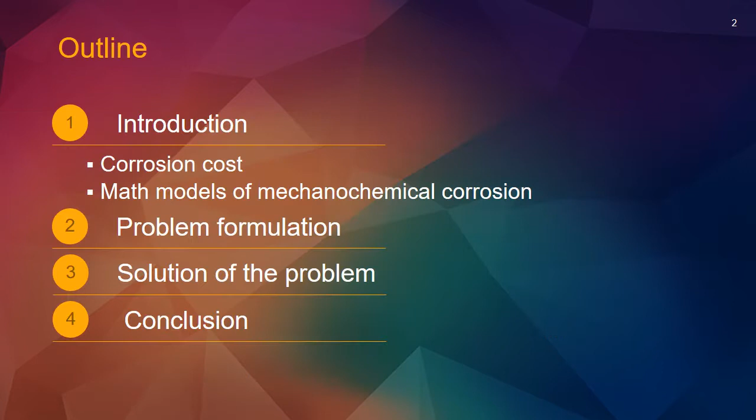Dear colleagues, our today's report is devoted to a thin-walled pipe exposed to corrosion under pressure and non-uniform heating. The outline of presentation looks like this.

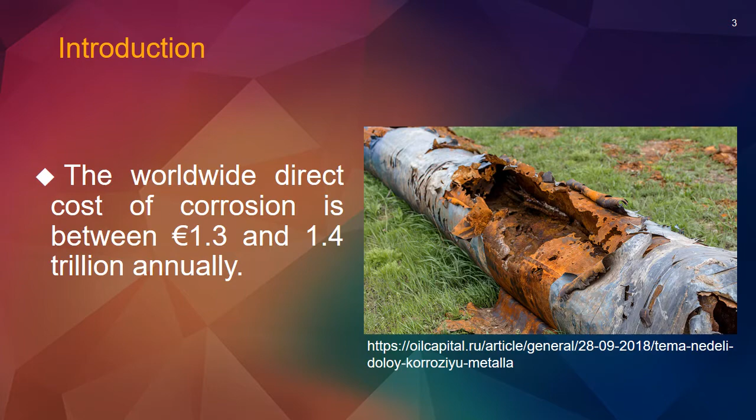Corrosion causes irreparable damages of industrial and building structures and leads to reduction of their durability. According to open data, the annual corrosion costs ranged from 3 to 6% of the gross national product of each nation. There are a lot of classifications of types of corrosion. On the screen you can see only some of them. We will consider surface general corrosion and more specifically mechanochemical corrosion.

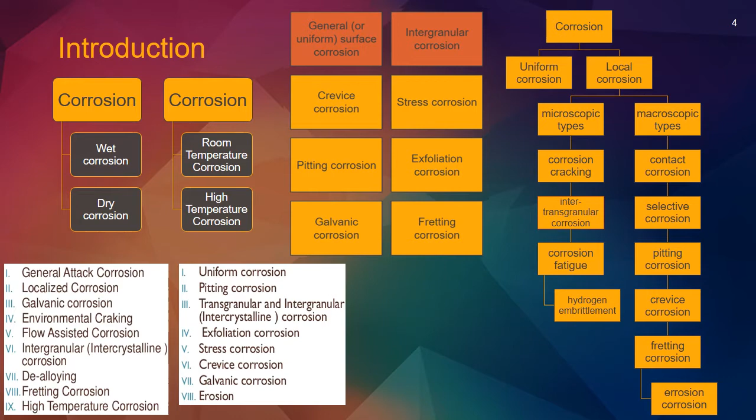Originally, the term mechanochemical corrosion was introduced by Emmanuel Gutman with respect to general corrosion facilitated by mechanical stress, to be more precise, for anodic dissolution of deformed metals. So, mechanochemical corrosion is more intensive than the simple superposition of damages induced by mechanical stresses and electrochemical corrosion taken separately.

There exist various models of corrosion kinetics. Gutman received the exponential dependence of the corrosion rate on the mechanical stress. According to Rusanov, dissolution rate is a quadratic function of strain components. According to experimental results, the rate of general corrosion is often a linear function of stress, if stress increases beyond a given threshold. This model with zero threshold will be used in our work.

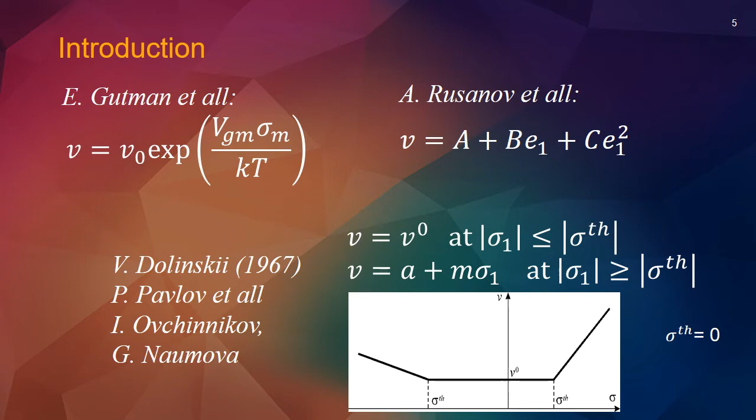Consider a linearly elastic thin-walled pipe exposed to corrosion under internal and external pressures of different environments at generally different temperatures. Let the inner and outer radii of the pipe be denoted by small r and large R respectively. Assume that the corrosion process is uniform along inside and outside surfaces with the rates denoted by Vr. We will consider only those situations when the maximal stress used in the corrosion kinetics equations is the hoop stress.

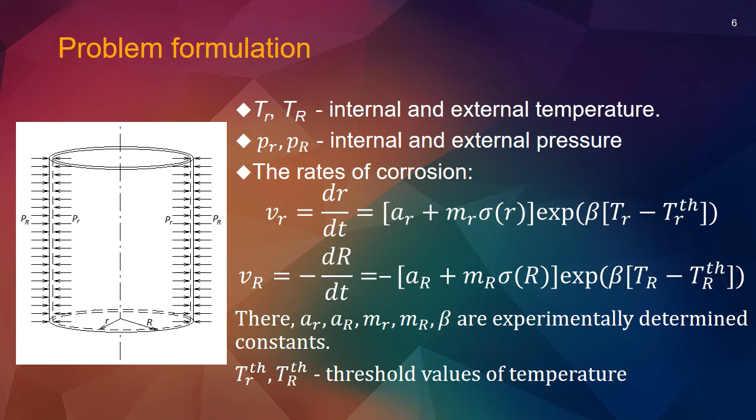First, let's take a look at the known solution of the problem based on the classical thin shell model. In such case, maximum stress is expressed by the Navier's formula and assumed to be constant through the shell's thickness. The problem is reduced to an ordinary differential equation in the thickness of the shell. As we can see, this solution does not reflect the effect of internal and external pressure values themselves, but depends only on their difference.

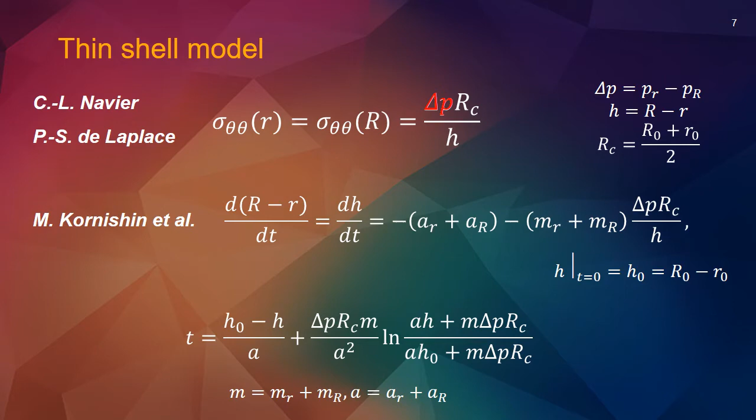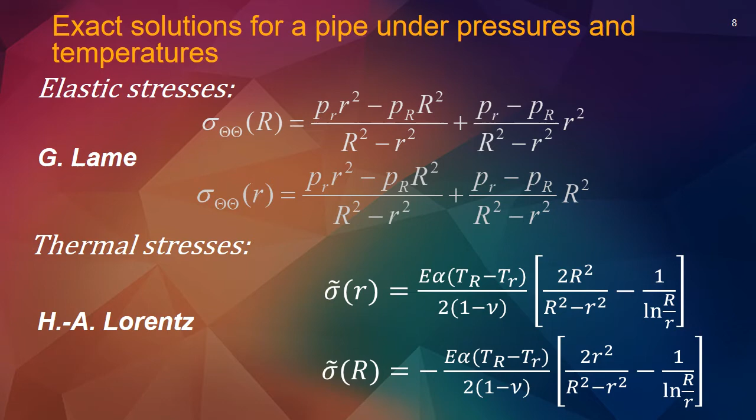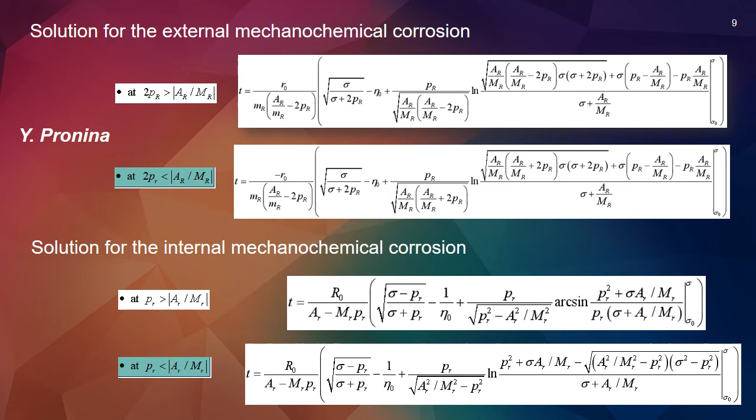Explicit solution of the thermal elasticity problem for the pipe under internal and external pressures and different temperatures is known. Solution to the corrosion problem based on Lamé's and Lorentz's formulas is rather cumbersome. Here you can see it only for the one-sided corrosion, so we tried to simplify it. After certain transformations, Lamé's and Lorentz's equations can be simplified to the following form, which differs from the classical thin shell solution by the constant terms.

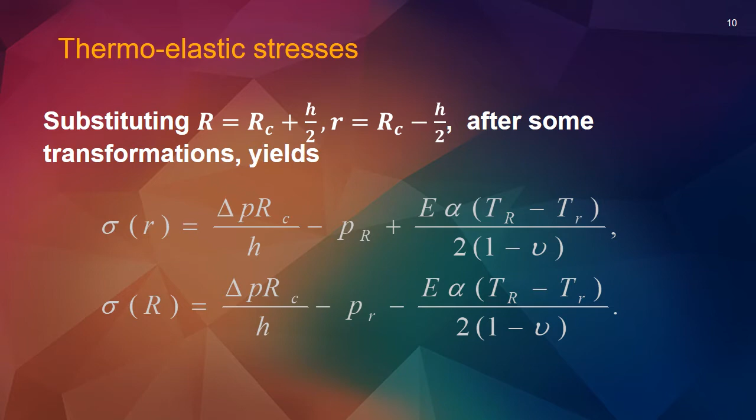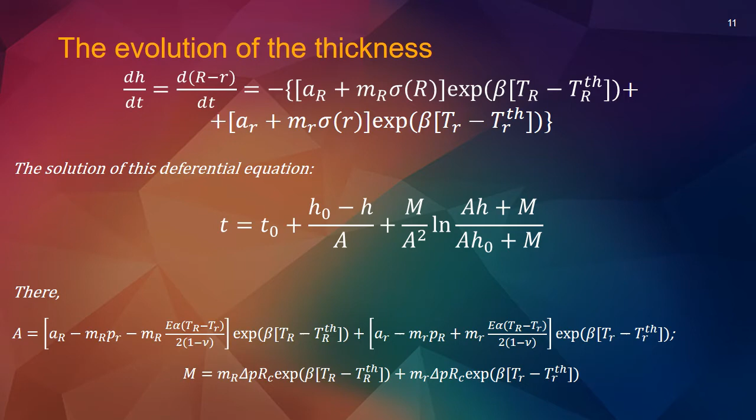Substituting both expressions for the stresses in the corrosion kinetics equations, we obtain the equation for the evolution of the pipe thickness with time. Solution of this differential equation can be obtained in this simple form, which is absolutely the same as the solution based on the classical thin shell theory, with only constants a and m being different.

Using the thin shell model for the problems of mechanochemical corrosion can lead to a significant error when both internal and external pressures are high enough.

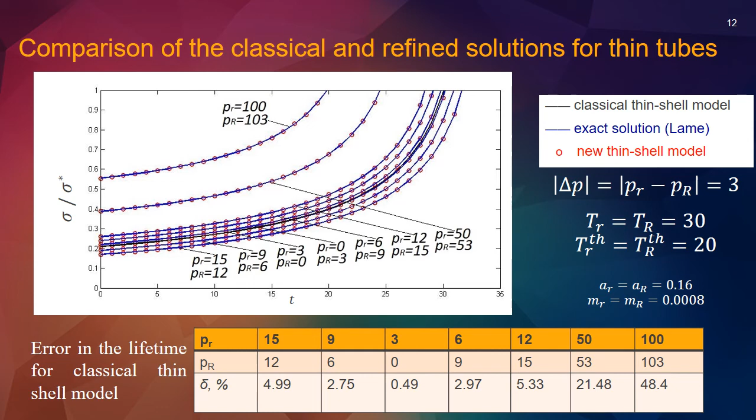As we can see from the table, the greater both pressures are, the more the error grows. So, the solution based on the thin shell theory can give essentially overestimated lifetime for large pressures, which can lead to dangerous situations.

If we define lifetime of the tube as the time when stress reaches a given strength limit, then we can see that for positive pressure difference, the thin shell model gives underestimated lifetime, while for negative, overestimated.

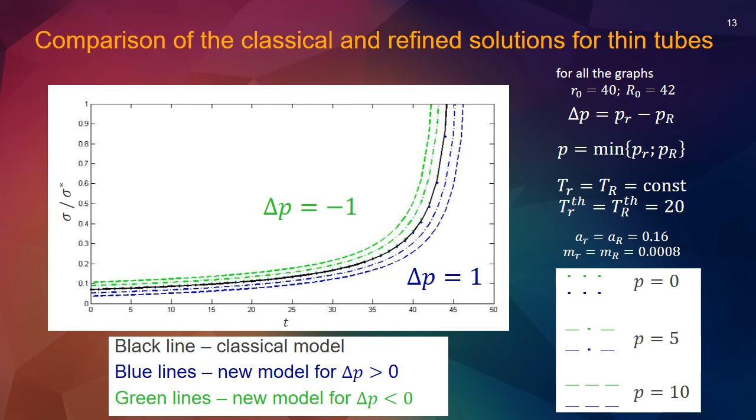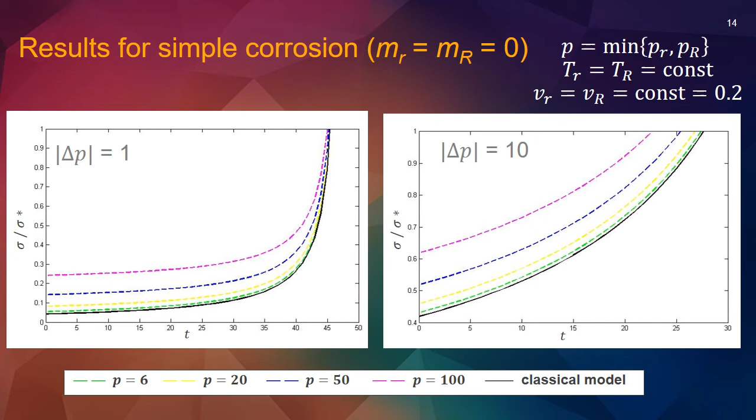The growth of the maximal stress determines the life of the pipe in each case. The change in the location of the maximal hoop stress may affect the life of the pipe only a little.

However, note that the temperatures can directly change the constant part of the corrosion rate, affecting their life even at equal temperatures inside and outside, i.e.

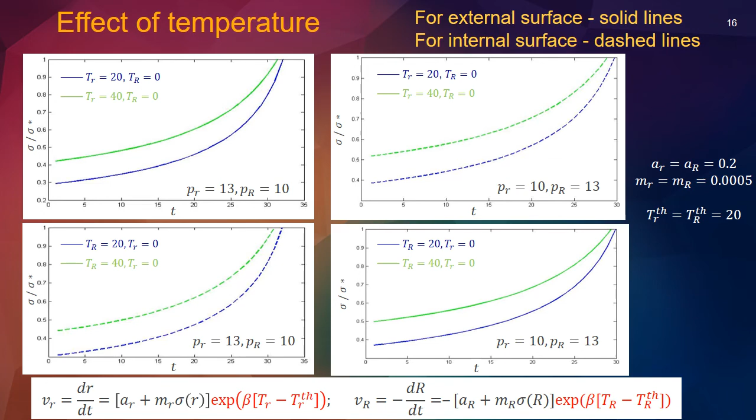at zero thermal stresses. To analyze the role of the elastic and thermal stress components, we build the graphs of their growth with time taken separately during the process of the shell thinning.

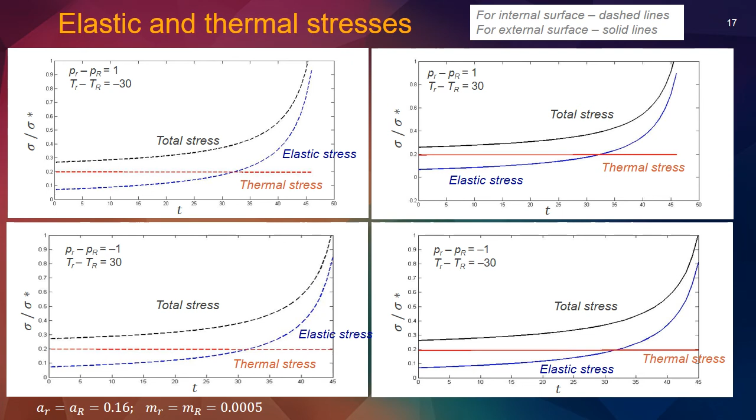Therefore, it is the elastic stress component which takes part in the mechanochemical effect and leads to synergetic growth of total stress and the rate of dissolution, but not the thermal stress.

Using the classical thin shell model can lead to a large error in the lifetime of the pipe subjected to mechanochemical corrosion under pressure and non-uniform heating at large pressures, especially when their common part is greater than their difference.

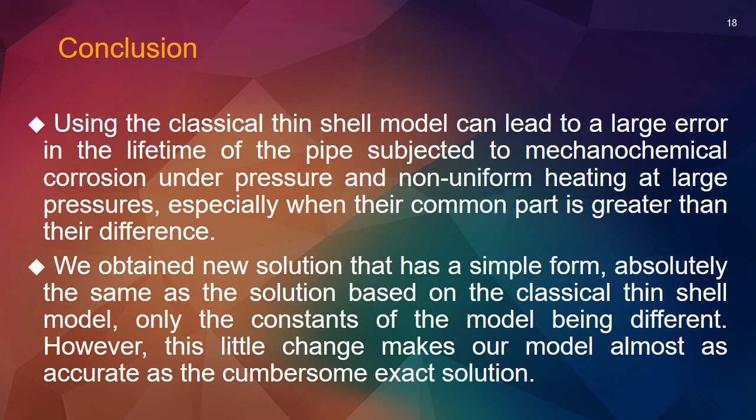We obtained a new solution that has a simple form, absolutely the same as the solution based on the classical thin shell model, only the constants of the model being different. However, this little change makes our model almost as accurate as the cumbersome exact solution.

Our analysis revealed that the elastic, but not the thermal, stress component plays a decisive role in the synergistic growth of the total stress and the corrosion rate.

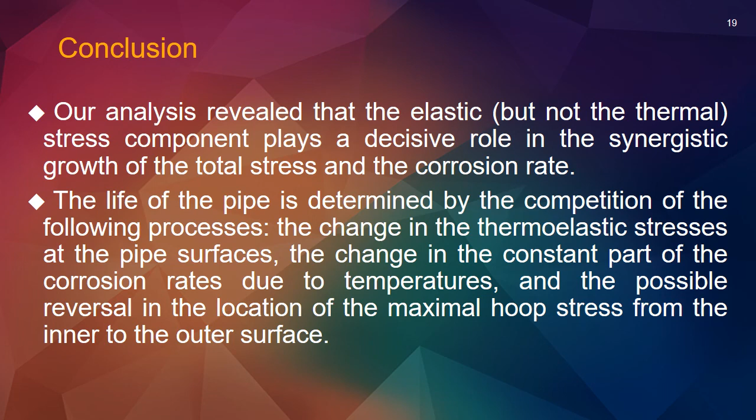The life of the pipe is determined by the competition of the following processes: the change in the thermo-elastic stresses at the pipe surfaces, the change in the constant part of the corrosion rates due to temperatures, and the possible reversal in the location of the maximal hoop stress from the inner to the outer surface if the signs of the elastic and thermal stress components on the inner surface are opposite.